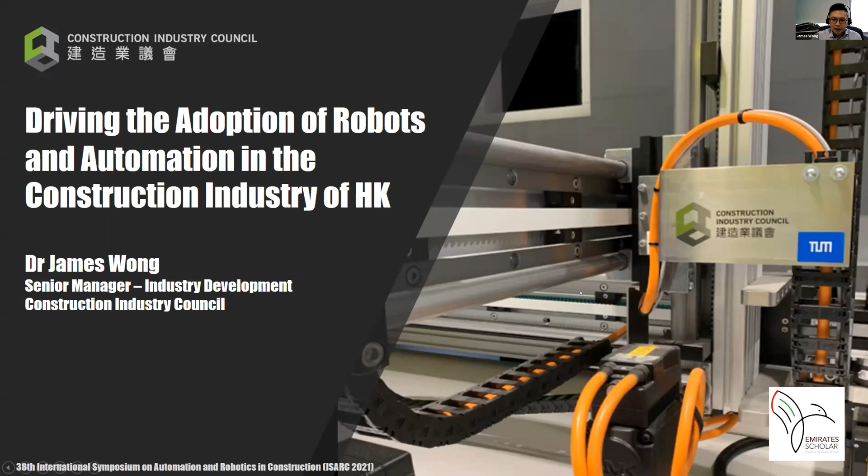Very quickly about the CIC: we are a statutory body in Hong Kong to drive the development of the whole construction industry. To put it in layman terms, we try to make the construction industry in Hong Kong safer, faster, cheaper, and greener.

Today's presentation will focus on three questions: why we are driving the adoption of robotics and automation in construction, what is the current situation, and how we have been driving it.

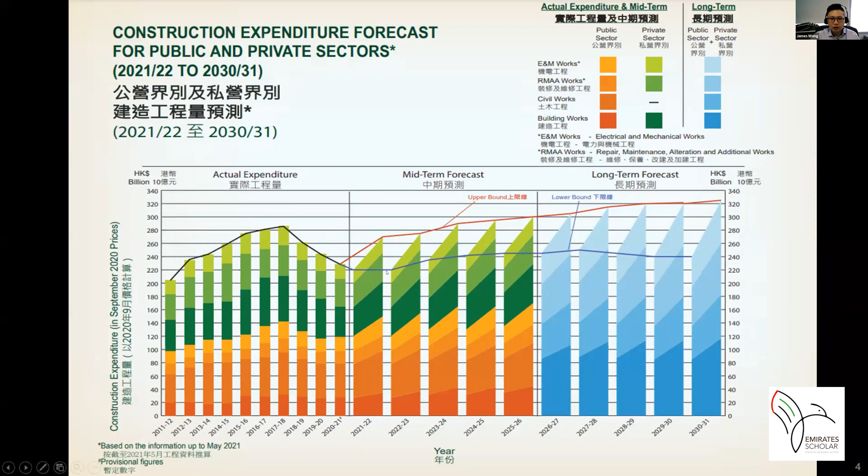In terms of construction volume in Hong Kong, even though we are a small city, the construction volume is up to 320 billion Hong Kong dollars per year, which is around 40 billion US dollars. This is one of the challenges we have to face.

On top of that, construction workers in Hong Kong are facing a quite serious aging workforce issue. About 44% of the workers are older than 55 years old.

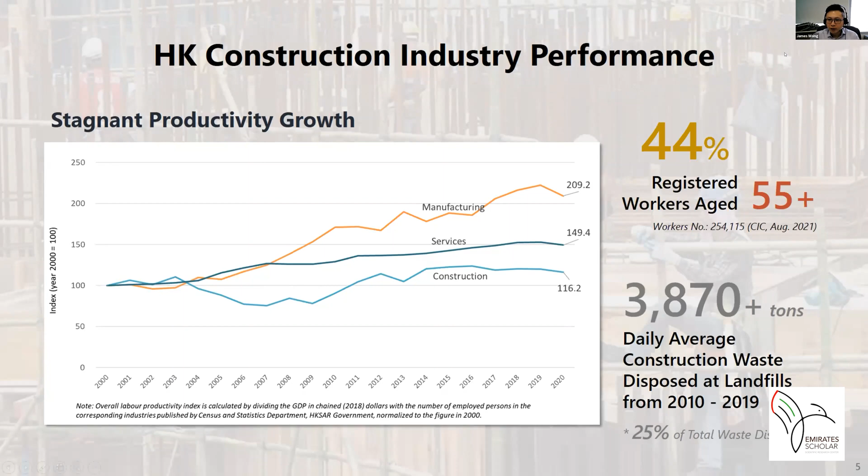From this graph, you can see our construction productivity has been increasing quite mildly compared to the service industry and manufacturing industry. We also generate a lot of construction waste every day.

In terms of safety, even though the accident rate has been decreasing over the past years, the fatalities in our industry are still quite alarming. For example, on average over the past 20 years, we have had 20 workers die in our industry.

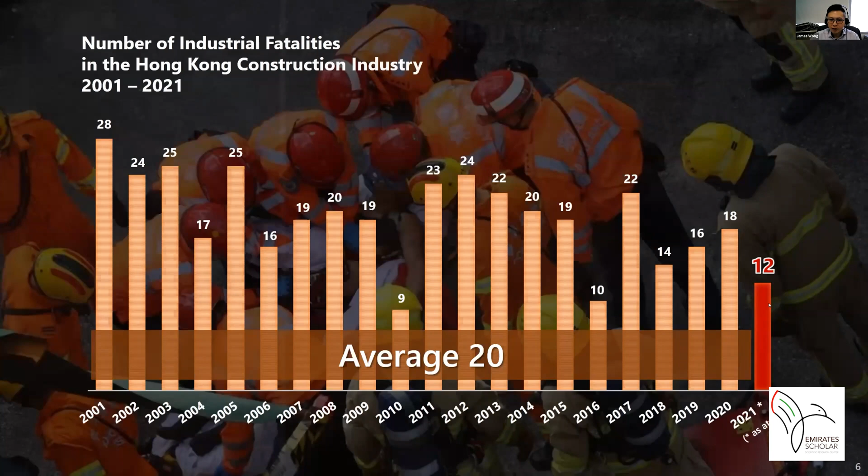That's why our industry has been trying to move on and change how we build, from a very labor-intensive way to, for example, off-site construction as well as automation and robotics.

The government has issued a publication called Construction 2.0, which promotes innovation, professionalization, and revitalization. In terms of what we're adopting, Hong Kong is still actually in the infant stage of adoption of robotics in construction, but we start to adopt in a number of ways.

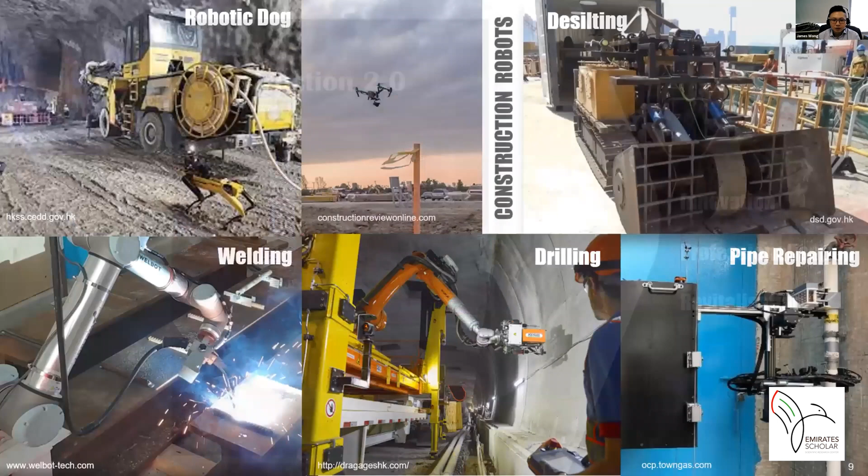The most common way, of course, would be UAVs, the drones for site inspection and surveying. Recently, our government department,

named Civil Engineering and Development Department, has been adopting robotic dogs for sloping works or confined spaces to do some inspection. Another department, the Drainage Services Department in Hong Kong, has developed

desilting works for their drainage work, to clear some waste and to save labor in even very unsafe working space under the ground. More commonly, we have some welding robots adopted in some construction sites recently,

for structural steel connections, as well as some bored piles work. It's also not uncommon to have some drilling works.

This one is under a tunnel, developed by Dragages. Another one would be pipe repairing works, developed by Towngas, one of our utility companies in Hong Kong. They collaborated with a university research team to develop this kind of pipe repairing robot, again, to save workers from unsafe work.

In terms of R&D, CIC has a research fund, and the government also has its own research fund. This is one of the funded projects in Hong Kong, done by a local contractor, who is trying to develop a robot arm to work under a lift shaft, doing grinding and bracket installation work in this very dangerous zone of the construction site.

On the right hand side is the Robotics Catalyzing Center developed by the Hong Kong Science and Technology Park. It provides a working space and prototyping services for solution providers to conduct integration, assembly, validation, and complete factory acceptance tests for their robots.

For certification and recognition, CIC is developing a certification scheme for construction robots. We start with three trades: welding, painting, and plastering. The robot must qualify or pass tests on three items: safety, quality, and functional performance—for example, how it can move along the construction site.

Once certified, contractors on the demand side will have better confidence to adopt construction robots at their site. On the supply side, robot suppliers also have a standard to achieve in terms of safety and quality requirements, so they can become certified. This helps stimulate demand and supply for construction robots in Hong Kong and overseas.

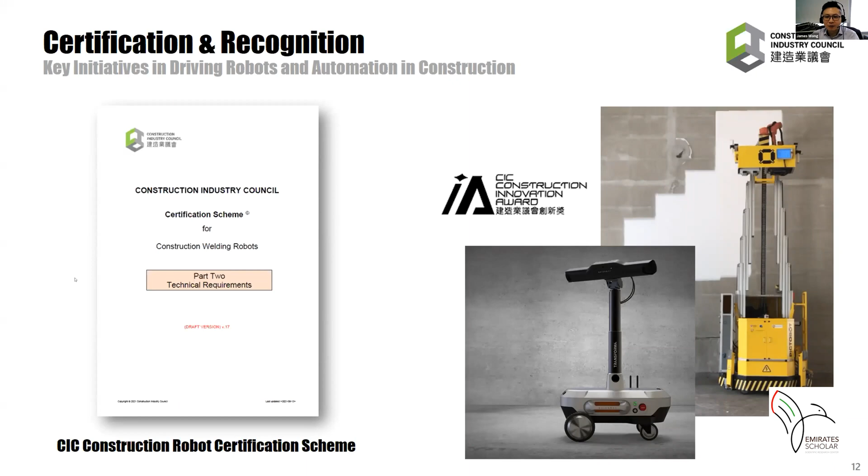For recognition, we also organize the Construction Innovation Award twice a year. Last time, in the international category, we awarded Robotics in Singapore the international grand prize for their painting robot and inspection robots. Anyone interested can apply for our Construction Innovation Award next year.

Finally, promotion and application. At CIC, we promote a lot of new technologies and advanced materials through various webinars and shows. For example, in 2019 and also next year, we will hold a large-scale Construction Innovation Expo in Hong Kong. If you're interested to showcase your products, contact me and we can engage you to showcase your construction robot at our expo next December.

We also organize an annual symposium on construction robotics and automation with the science parks. We also have a physical site called CITAC, the Construction Innovation and Technology Application Center, to showcase the latest technologies, including robotics.

In Hong Kong, the government has injected 1 billion Hong Kong dollars so that construction contractors, consultants, or even clients who are interested in applying new technologies like robotics, but lack financial support, can be supported through this CITF fund.

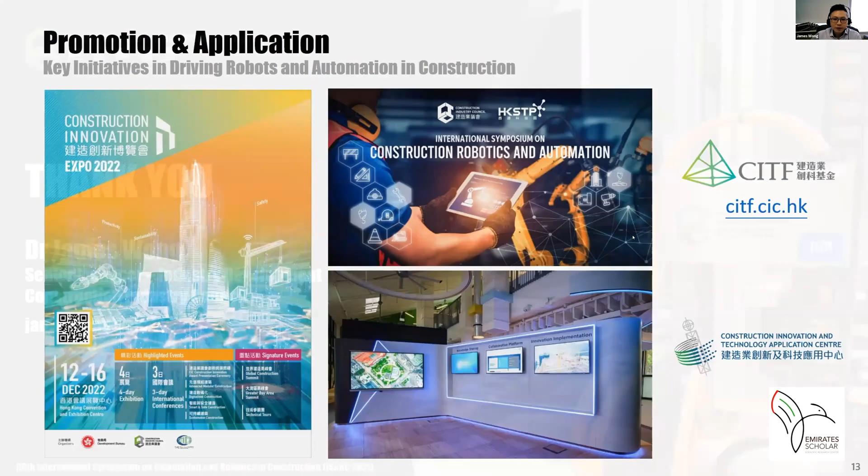That's all for my presentation. You can see my email—if you need to connect with me, feel free to email me.

Thank you. Excellent, James. Thanks a lot.

Same as for Tobias, I think there would be...